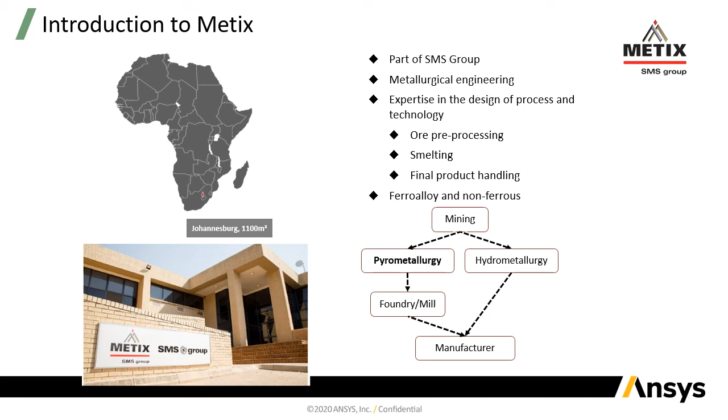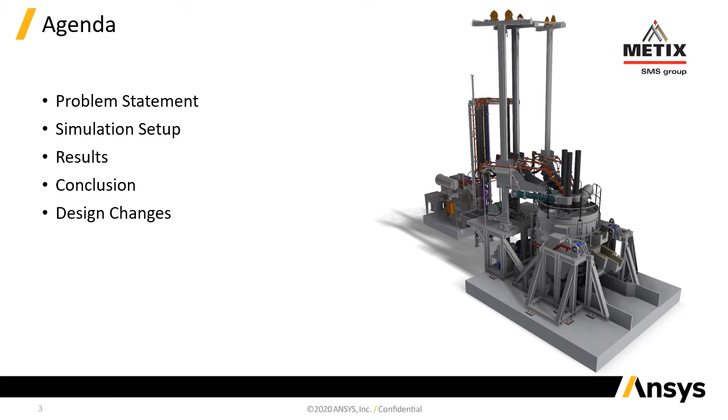So just a quick run through the agenda. I'll introduce the problem statement and then hand over to Evan, who's going to run you through the simulation setup, the results, and the conclusion. And then we will tie it all back together in the design changes, how we've incorporated the learnings from the work that Evan and myself have done to arrive at a mature design.

Okay, so what was the challenge? Well, Metix was placed in the unenviable position of being handed a design for which we needed to take responsibility, but had absolutely no hand in designing in the first place. So after evaluating the original design, we came to the conclusion that there were inherent elements to it that made us feel uncomfortable. And we opted to adopt a more familiar design as found elsewhere in the SMS group.

What this meant was that we needed to undertake a very, very accelerated due diligence on this revised design, which is why we were infinitely thankful to be able to reach out to QFinSoft and to Evan in order to assist with this accelerated due diligence.

So where does the arm and electrode mast fit into the bigger picture? Well, the application in this case is for a very, very small pilot scale tilting alternating current electric furnace. Only about 2.2 MVA, which sounds like a lot, but for electric arc furnaces, this is a baby. The furnace is only about 2.5 meters in diameter.

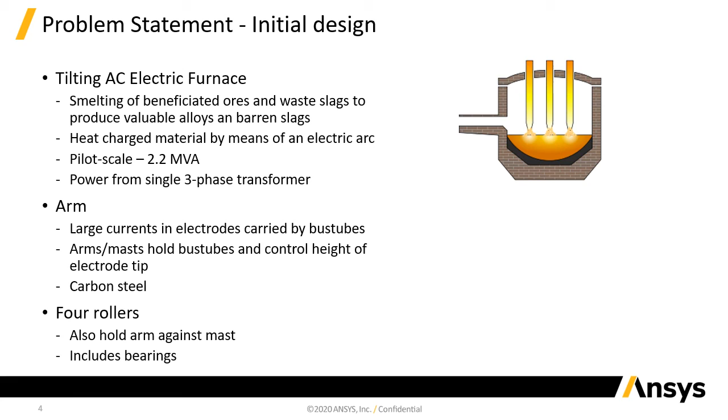The electrode arms are responsible for regulating the electrode position during operation, but also, as important, to completely remove the electrodes in order to allow the furnace to tilt in the first place. They're traditionally constructed from water-cooled carbon steel, but in this case the simplified construction did not afford the opportunity to water cool every element of the electrode arm.

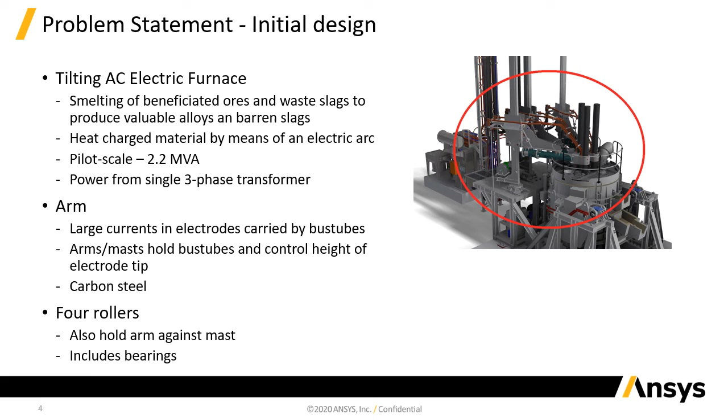So what you see here is a bit of a breakdown, just so that you understand what we're talking about as Evan proceeds to run you through his exercises. So we refer to this front section as the sail, the mast, which ties up with these long vertical members over here. We have the current carrying bus tubes on either side, carrying 4.5 kiloamps each, if memory serves, the carriage, and then the rollers, which will become a focal point for this exercise.

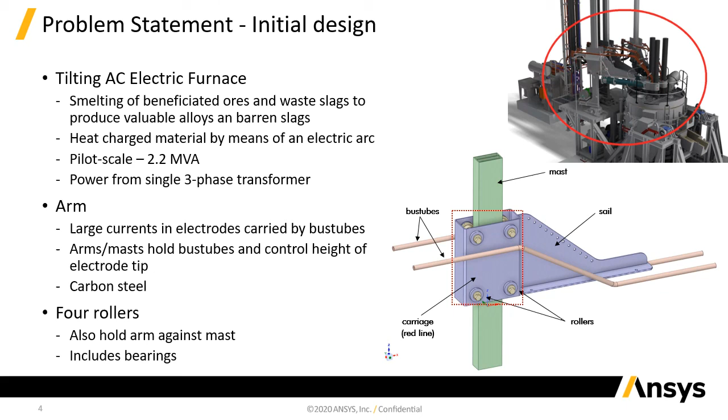So even though we now had an electrode arm design that was more familiar to us, we were going to be operating at higher power levels than we had before, which meant that our understanding of the inductive heating effects was now to be questioned. We did consider completely mitigating those effects by fabricating the electrode arm from austenitic stainless steel. However, at a cost factor of roughly 3 to 1, this quickly became a last resort as opposed to a first option. So in order to guide our decision making, we needed to quantify these heating effects.

Instead of bringing all these activities in-house, the time constraints of the project forced us to make the strategic decision to split our activities, divide and conquer, so to speak, where I would tackle the structural FEA component of it, and QFinsoft, aka Evan, would tackle the thermal electric modeling of it, with the idea that whatever lessons we learned from the thermal electric modeling could be incorporated into the final design in such a way that we would mitigate any excessive heating effects that may compromise the mechanical strength of the carbon steel.

Right, and taking those simulation goals into account, where we have the temperature rise coming from electromagnetic field, we need to combine the two different physics together. So this means we'll need to couple together two different software packages. So for the electromagnetic field, we'll be looking at ANSYS Maxwell, and then for the temperature distribution, we'll use ANSYS Mechanical

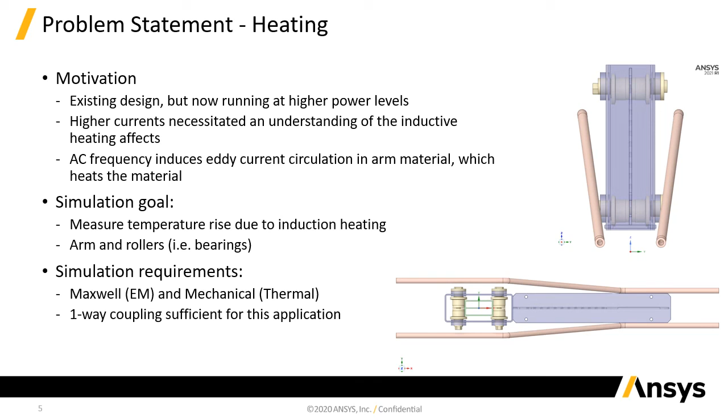So in discussions with Metix, there were a couple of different design options that we wanted to look at. So the initial one was the original design, which is just a full carbon steel construction, which is the cheapest option, but also the most likely to have problems with high temperatures. And then the other case was one where we would actually put an aluminium plate in there to shield the carriage from the electromagnetic field of the bus tubes. And thought that was quite a simple but very effective option, so we decided to look at that.

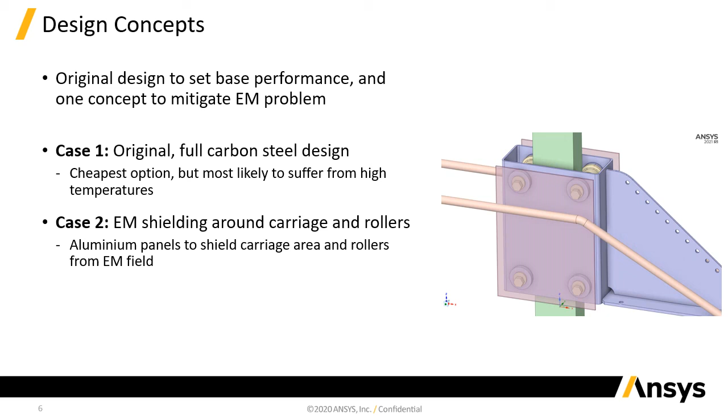So in Maxwell, fairly straightforward eddy current design type. So this is where we can specifically look at the induction losses in the components, and by nature that is a static simulation. Even though we are using an AC current, the final result is essentially a static result. So you can see we have quite a high current there at 50 Hertz frequency.

And we've got two bus tubes bringing current in, but the current in one of the bus tubes is 120 degrees out of phase with the other one, so we could set that up in the boundary conditions as well. And then we included solid conductors, just that'll affect how the losses are generated in the bus tubes.

And then what's quite nice with the electromagnetics packages is they make use of adaptive meshing. So this makes meshing significantly easier and a lot less effort. But we did add some manual refinement in the arm and rollers just to make sure we got the fidelity we required in those areas. And then the adaptive meshing does focus around the frequency of our simulation. So the 50 Hertz of the current is what we adapted around.

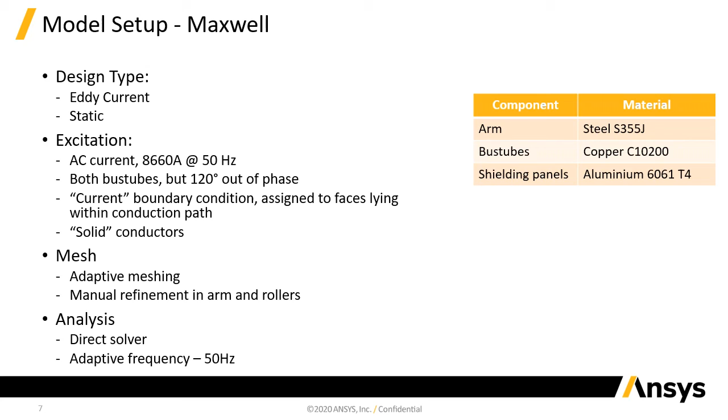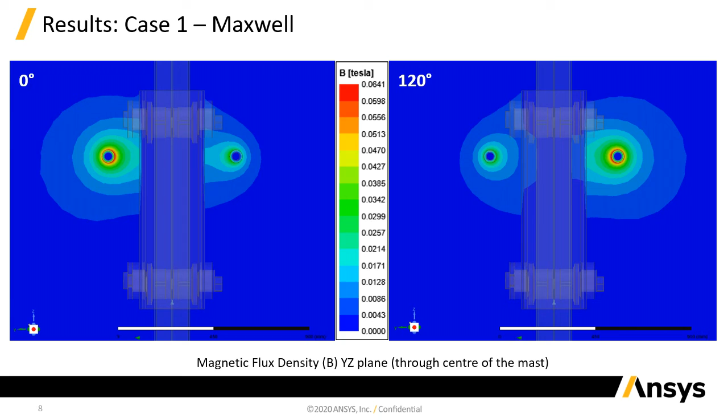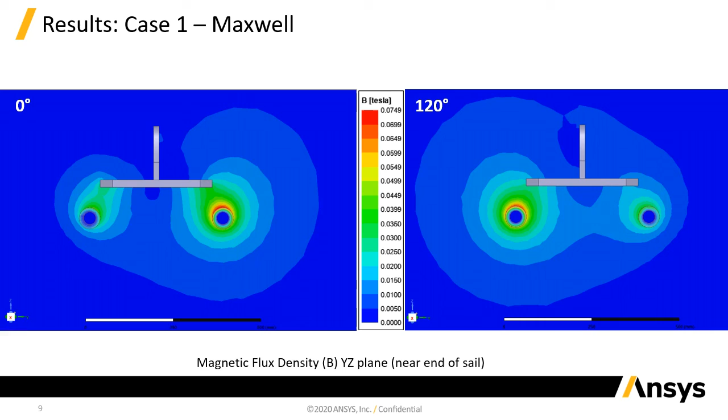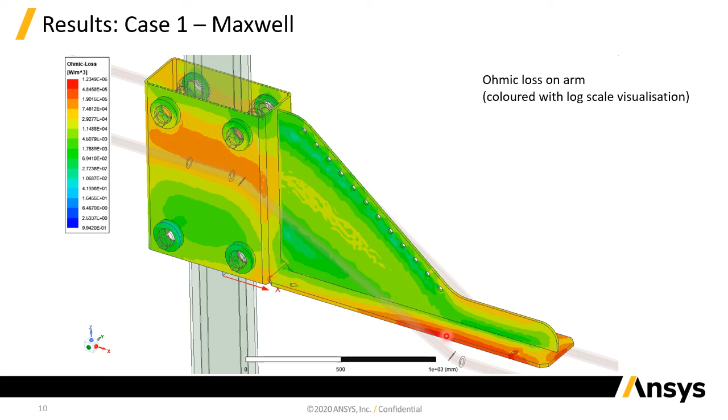And this region is sort of closer to the upper rollers, so we expect to see much higher temperatures in the upper rollers compared to the lower ones. And you can see here that the major loss within the arm from the ohmic loss is actually at the end of the sail, where the bus tube is running very close to the arm component there.

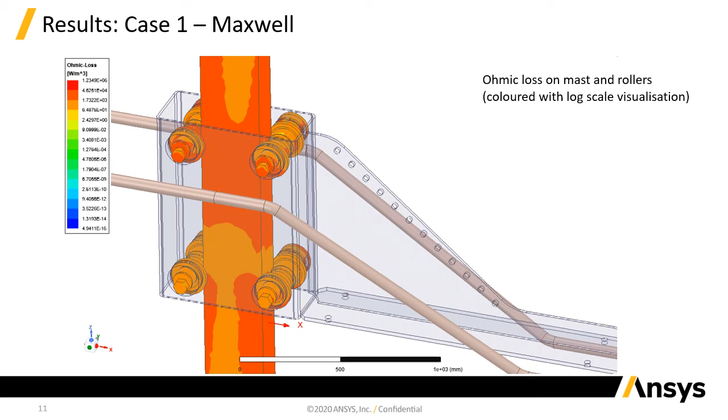And basically, this just makes it so much easier to move from our electromagnetic simulation to a physical structural model without actually having to go into another package. So we can do our model from a thermal point of view. We can model conduction and convection within our components, all staying within the Electronics Desktop. The only limitation for the thermal side is that radiation is not currently supported, so we couldn't include that, and you'll see that that becomes important later. So we have to move away to a different method.

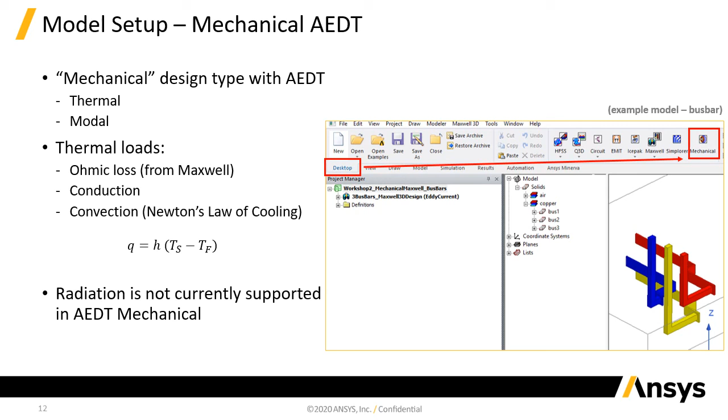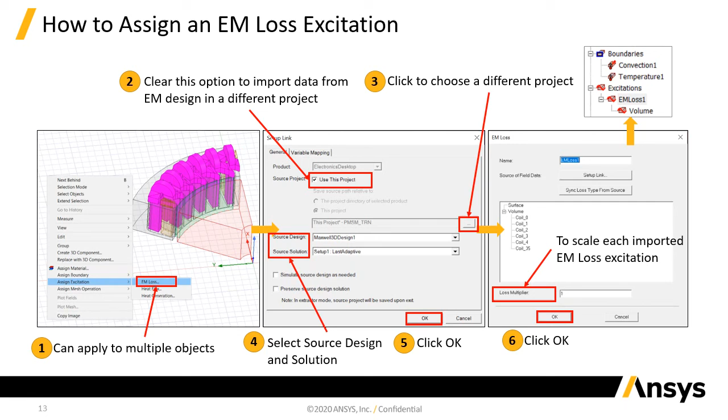Okay, so for those of you who are doing some basic thermal analysis, just bear this in mind that this is an option for you to use. But as I said, radiation will show to be important. So we had to make use of Workbench Mechanical, the full mechanical solver.

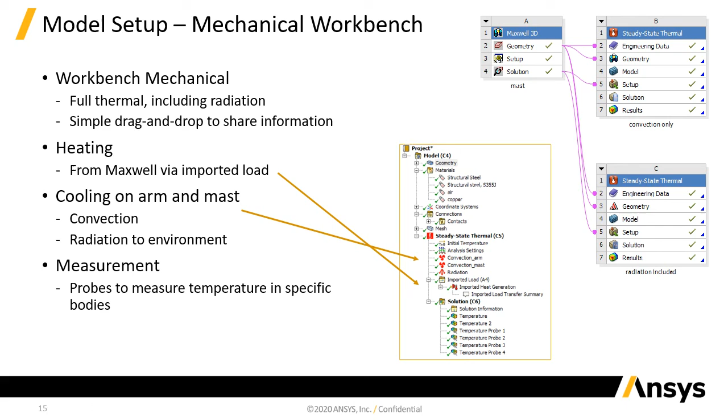And then obviously radiation, we sometimes ignore, but can actually be quite important, especially when there's a large difference between the heat of the components and the surrounding area. Okay, so this just proves that we need to consider all the different types of heating and heat loss, because they can be quite important.

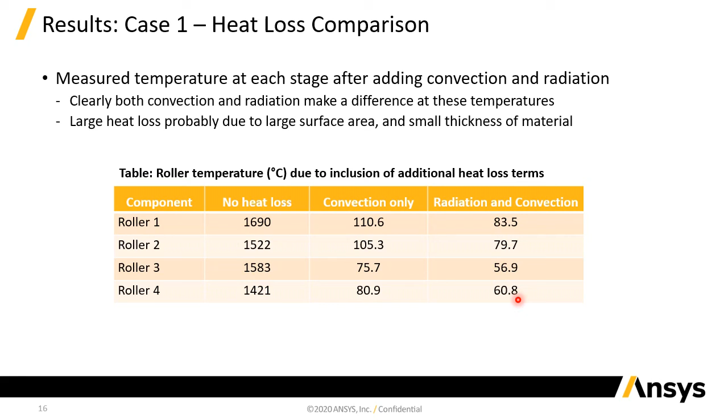And then if we look at the temperature plot for this case, for both the convection and the radiation, we can see that the peak temperature in the carriage area is about 90 degrees here, obviously where the bus tube runs near to the carriage. But the highest temperature that we measured was actually down here at the end of the arm, at about 166 degrees Celsius. And I imagine, just because there's far less material, the bus tubes are running even much closer to the arm, so we get a much larger heating effect in that area.

Okay, and on the right here we see the temperature distribution within the mast, and we can see that obviously temperatures are much lower, but heating from the mast itself, as well as conduction coming from the rollers, will heat this area up significantly. And you can see here we have a much higher temperature in line with where the bus tubes would run across the carriage.

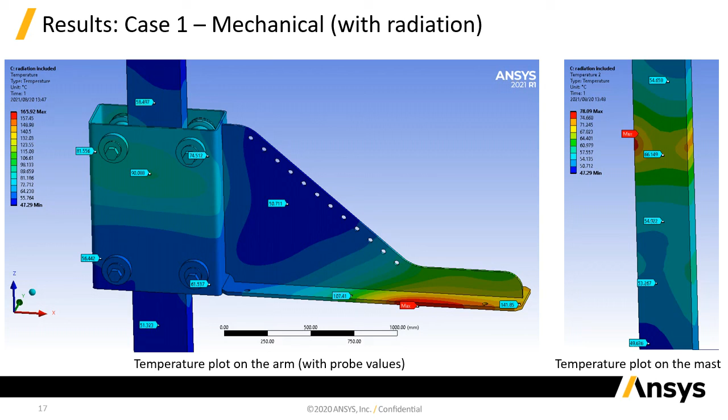Right, so then moving on to the second design, now that we've got a base case to compare with, we looked at adding aluminium plating between the carriage and the bus tubes. So this is a plate the same size as the carriage and about 10 millimeters thick, and it's situated halfway between the carriage and the bus tubes. All right, so this is quite a simple fix, and we wanted to see how effective this would be in reducing temperatures within the rollers.

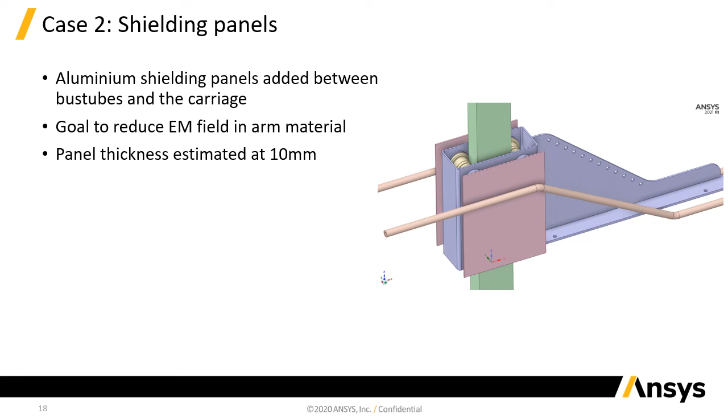So if we look now at the B-field plots, on the left-hand side we see the B-field contour plot for the design with shielding for case 2, and on the right-hand side we see it for the option where there was no shielding, so you can compare the intensity of the field, and you can see quite dramatically how just a simple aluminium plate really blocks off the field from reaching the carriage. So there's a strong interaction between the bus tube and the aluminium plate itself, and that prevents the field from passing past the plate to the carriage. Okay, so even visually we get quite a significant shielding effect there from these plates.

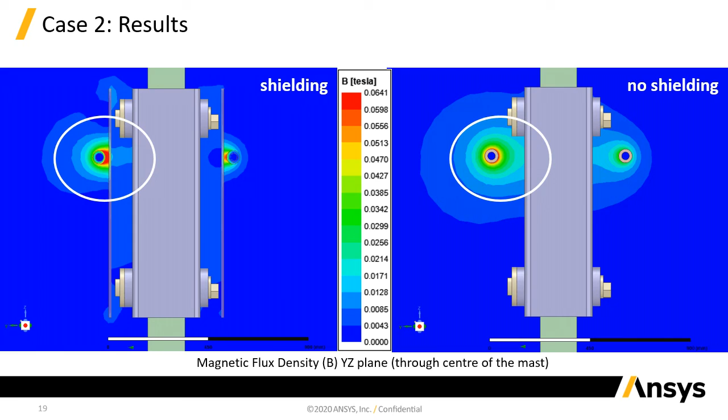All right, and if we look at the ohmic loss within the mast or the arm, you'll see here that in the area where the bus tube runs close to the carriage, we get quite a significant reduction in the overall ohmic loss in that area. But if we look down at the end of the arm, where there is no shielding and where the bus tubes run close to the arm, we still get a similar loss as before. Okay, so we can see that there's a very localized effect from the shielding. So that's something we really need to take into account moving forward with this design.

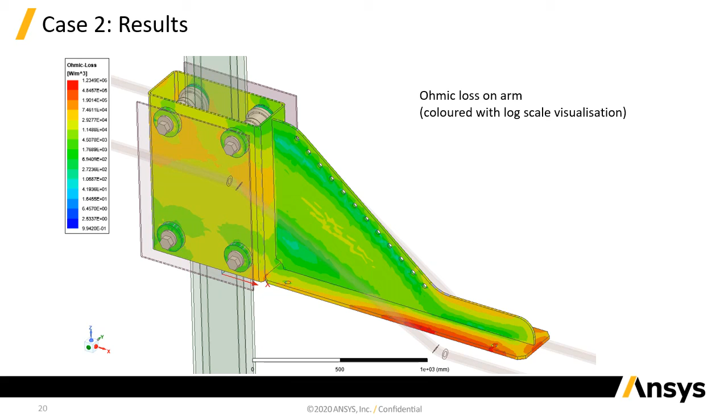We look at the temperature plots as a result of that. We can see that here on the carriage area, as you saw with ohmic loss, there's a significant reduction even in the region where the bus tubes run across the carriage. And if we look at the end of the arm there, where there's no shielding and the bus tubes are running across, we're getting essentially the same temperature as before. Okay, so again highlighting how localized the effect of the shielding is.

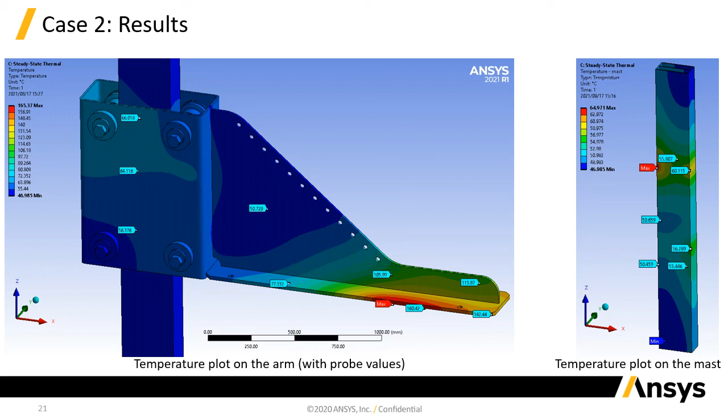Okay, so that's quite a positive result from this design, but obviously we just need to take into account that the shielding effect is very localized.

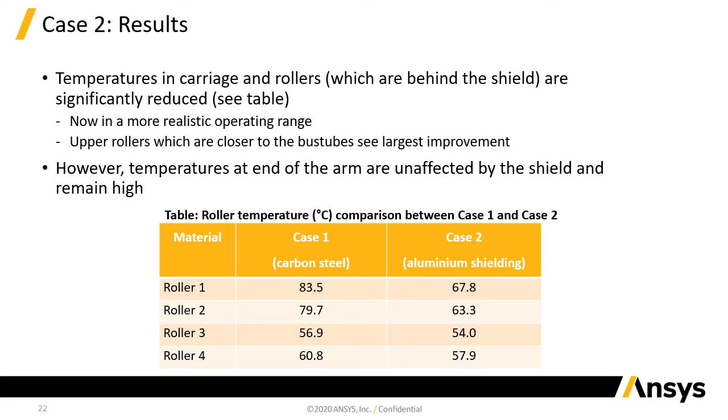So just to conclude, as we saw, the original design had quite a high resultant temperature from the induction heating, 165 degrees, and the carriage area was about 90 degrees. And this obviously meant that the roller temperatures were far too high for normal operating, being up to 85 degrees or so. So we did need to find a way to mitigate the heating from these cases. And this is where we brought in the aluminium shielding, which made quite a significant difference to the temperature in the carriage area.

But obviously the shielding was very localized, and moving outside of that, we still ended up with the same temperatures as before. Okay, so quite a nice result from this, showing that quite a simple change can make quite a difference to the operating of this design.

And before Phil talks a bit more about the final design that we went with, I just thought I'd throw in this quote here from one of Phil's colleagues, Brett Belford. He says, "Thank goodness we did the simulations, because the rollers in particular may not have had an adequate lifetime or would simply not have worked."

And this really just drives home the importance of simulation and why we offer simulation as a design tool, because it really allows you to look at different design options before you even go ahead with the design, spot any issues that might cause some downtime, and you can really optimize and improve the design to reduce cost and downtime before you even build the thing. So I just thought that summed up the project very nicely.

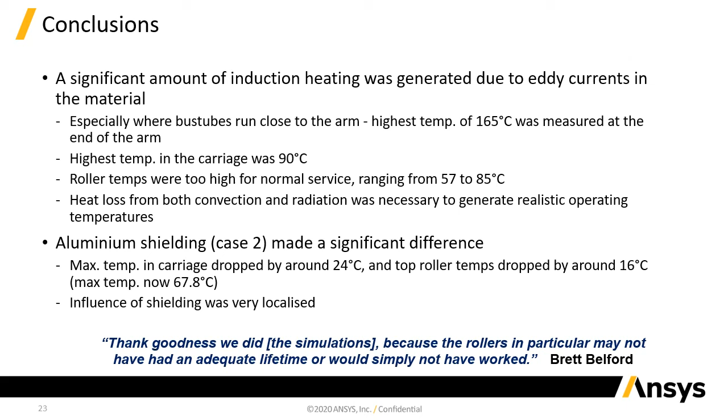Right, so thanks for your time. I'm going to hand over now to Phil, who's going to talk a bit about the final design that came about as a result of the findings of this project. So I think that'll be quite a nice way to sum up this work, and again, highlighting the design tool and the handiness of doing simulation work. So thanks, Phil. Over to you.

Thank you, Evan, for that intelligible presentation and conclusion. I'm sure, as most of you who work with the software on a daily basis will agree, the real simulation work seldom goes as smoothly as is portrayed in these presentations.

On the thermal electric side, the efficacy of the shielding cannot be denied. However, the possibility to implement that along the full length of the sail was limited, so instead we chose to eliminate the problem entirely by raising the bus tubes. It did come with the trade-off of longer bus tubes, which had a marginal cost implication, but it was considered to be worth it. However, proximity to the carriage and the topmost rollers could not be avoided, and as such we are left with a much smaller but still very effective shielding at the top to protect those elements.